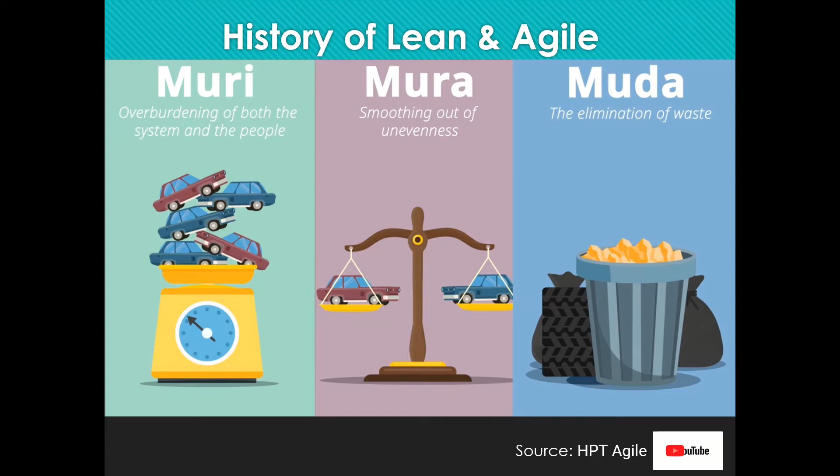It focused on three core objectives: the reduction of muri, or overburdening of both the system and the people; mura, or the smoothing out of unevenness; and muda, the elimination of waste. All three are important components, but within that, much focus is given to waste. A set of 7 types of waste were identified, including items like overproduction, defects, unnecessary movement, etc. An eighth item was introduced in the 90s around underutilization of people.

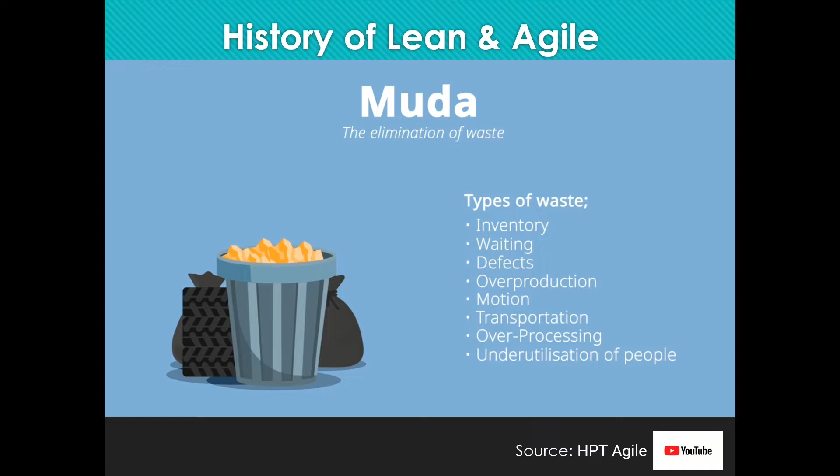Over the next 30 years, Toyota would go on to develop the Toyota Way. And as this gained traction around the world, and as it moved west, it would morph into what we now call lean manufacturing, or simply lean. This term lean was first mentioned in a paper in 1988, Triumph of the Lean Production System.

It still focused on Muda, Muri, and Mura, and also focused on increasing value by removing anything that does not add value. So, all in all, the second half of the 20th century saw the origins and flourishing of lean in manufacturing.

Over time, lean principles began to spread wider than manufacturing. Nowadays, we hear about lean product development, lean construction, lean government. This list goes on. In each case, the objectives can be very different, and hence the methodologies and thinking have evolved to solve the problems for that specific area.

So let's move on to Agile.

Iterative and incremental development can be seen as far back as the 1950s. But I'll start this story in 1986, because this was when a Harvard Business Review article called The New New Product Development Game used the concept of Scrum from a rugby scrum.

And it denoted a shift from the idea of relay races, with teams handing the baton to another team to finish the race, to the idea of a single unit of people working together from start to finish to complete an endeavor. It was in software development where these principles gained traction to become agile as we know it today.

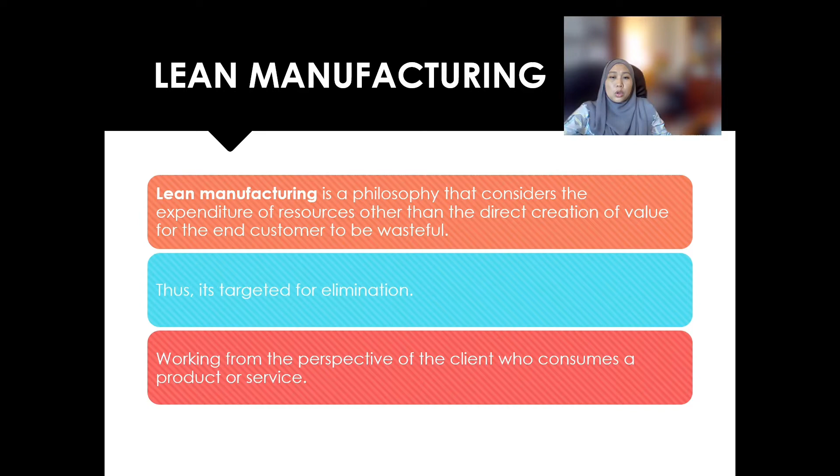Okay, we have learned about JIT. So as I mentioned previously, the JIT element concept is the effort in order for some company to achieve lean manufacturing. Thus it is targeted for the elimination - the final aim is to eliminate all the waste stated under the production, and work from the perspective of the client who consumes a product or service.

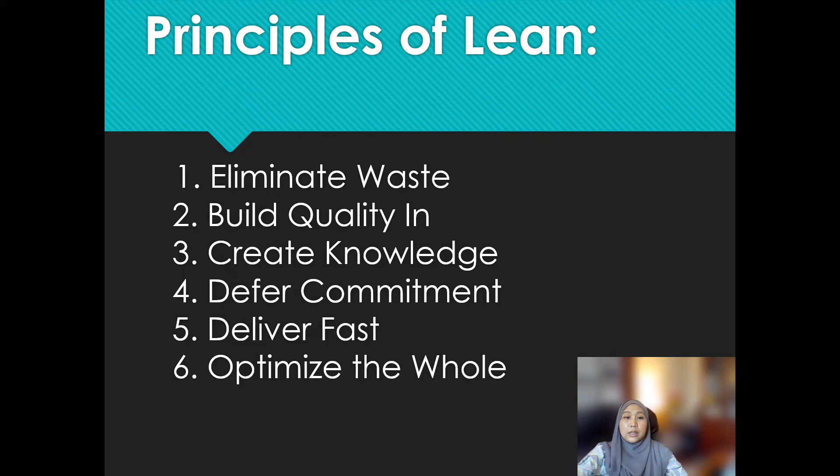So these are the principles of lean. The first one, eliminate waste. There are 7 to 8 wastes classified under production: build in quality, create knowledge, defer commitment, deliver fast, and optimize as a whole.

Alright, so let's see this lean manufacturing plant tour, one of the good examples for further your understanding.

You may have noticed a breath of fresh air is blowing over the Atlas Copco factory floor - a breath of lean air. Lean manufacturing is about the elimination of waste. We can really concentrate on the tasks which are giving added value to the product. We eliminate all other tasks which are not giving added value, like walking, waiting time, bad quality, and so on.

The new assembly lines look very different compared to the old ones. The previous assembly lines were designed in a totally different way. We looked to the compressor, we looked to all the material which was needed to assemble all types of compressors, and we put it into the assembly line.

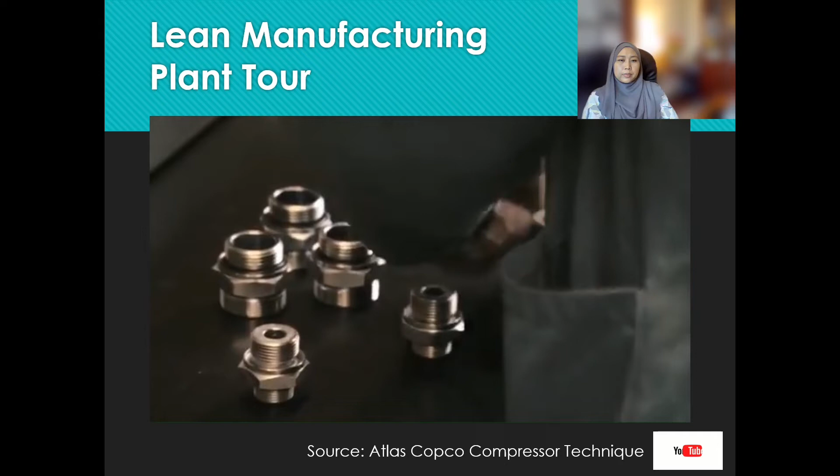In the old way of thinking, operators were literally surrounded by mountains of components. They had all the components in small blue boxes in front of them, and they had to choose the right component. Sometimes operators made mistakes and took the wrong component, and it led to waste. Those days are coming to an end.

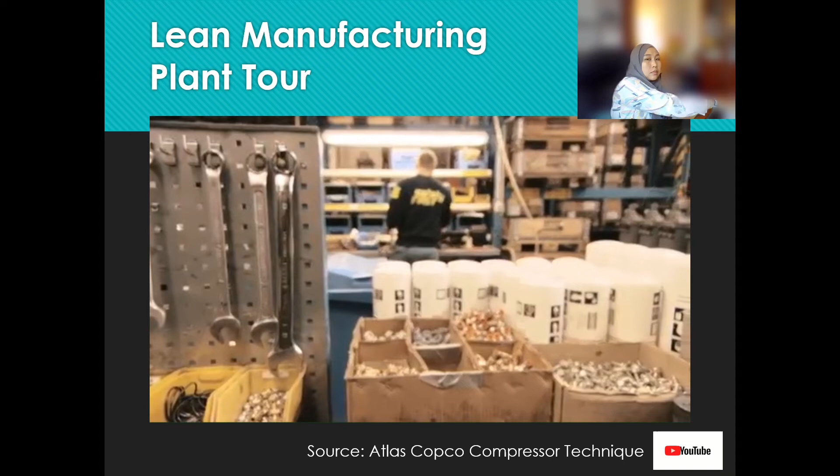Now we look to the operator and we look to the tasks of the operator. Instead of having all material on the assembly line, we bring the material to the operator in direct access to the operator.

On a lean line, the operator is the center of things. We bring all the material in sequence to the line, so the first component on the line is also the component he needs for the machine he is working on.

Quality is of course always our first concern. It's therefore we introduced tools like poka-yoke plates. The aim of the poka-yoke plate is that they start up at the beginning of the assembly by filling up this plate, and at the end of the assembly the plate must be empty.

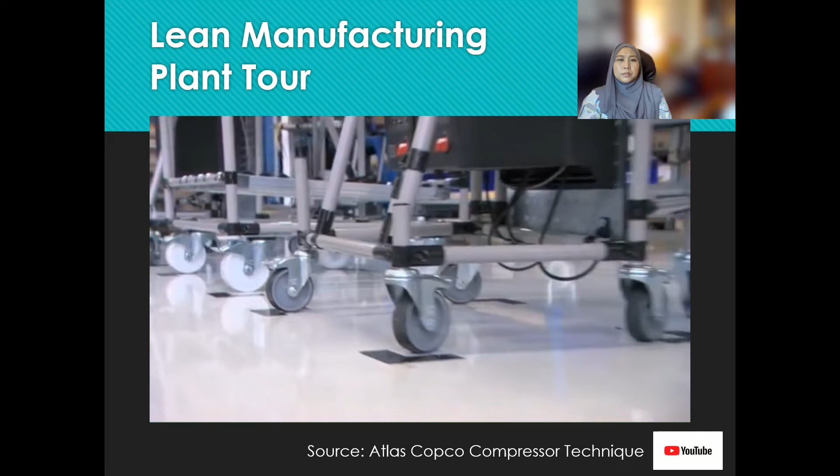The lean concept makes life and work easier for the operators. For instance, all carriers are on wheels. This also makes it easier to quickly adapt the line to changing production needs.

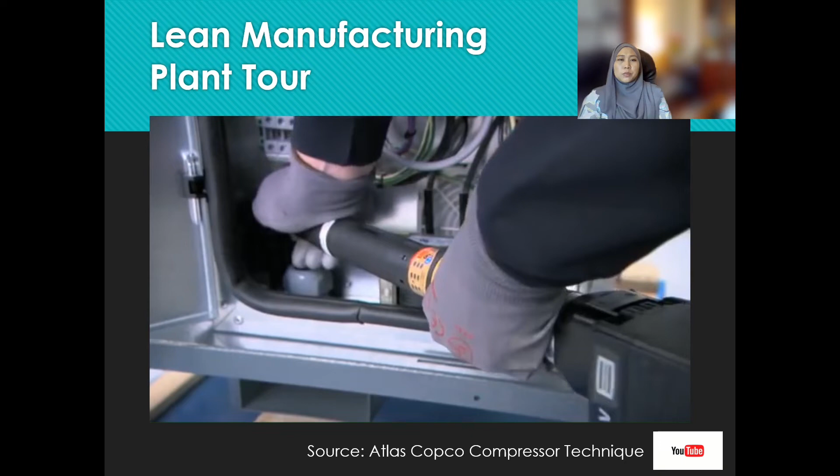Modern electrical tools are at hand. These ensure that the perfect amount of torque is applied and that all necessary screws are used. A barcode-based traceability system guarantees that all the right components are installed in each unit.

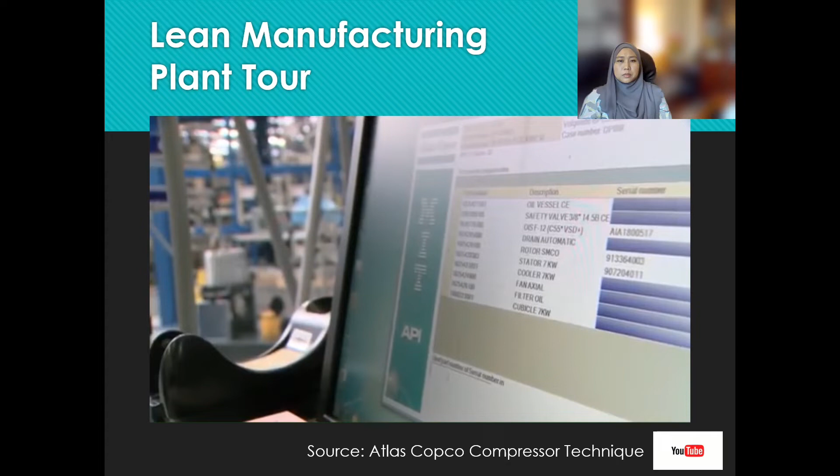We really focused on the design for assembly. We also looked at the way of working for the operator, so that the operator has easy access to all the components, so that he can easily assemble the components into the unit.

Another aspect of lean manufacturing is to strive for fewer components - try to standardize as much as possible. We try to have the same components as much as possible for the different types of compressors. By focusing on standardization, we're also able to reduce the total assembly time.

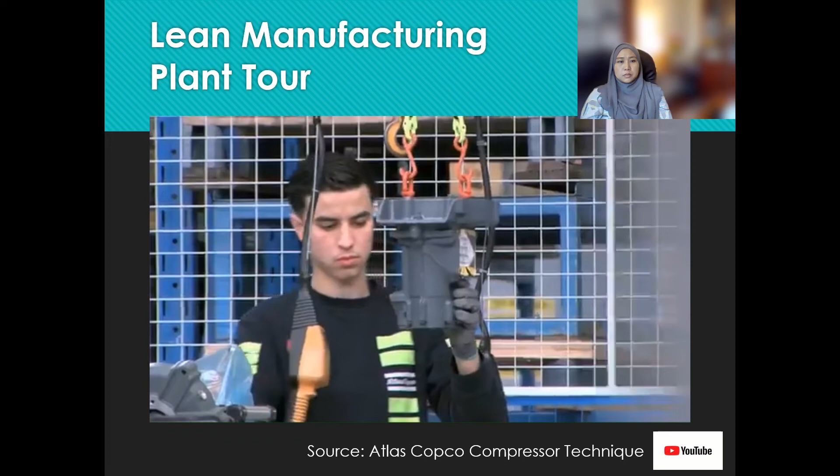As a result of the shorter assembly time, the throughput time is shortened as well. Lean manufacturing is essential in ensuring accurate delivery times for high-volume production.

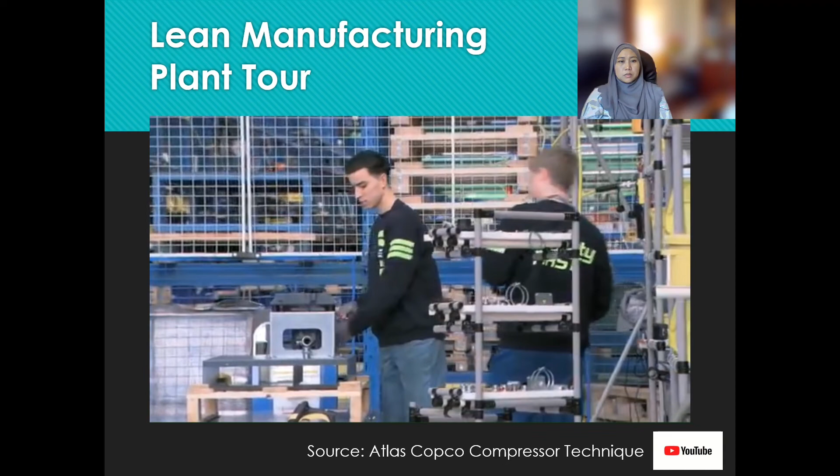Not only was the assembly time shortened, so was the assembly line. This assembly line is much shorter than the classical assembly line. For example, when we first designed this assembly line, not according to lean principles, it was 17 meters. Today, this production line is only 14 meters. This is only by implementing lean principles like sequencing, bringing material to the operator, and designing the workstation according to the needs of the operators, not according to the needs of the compressor anymore.

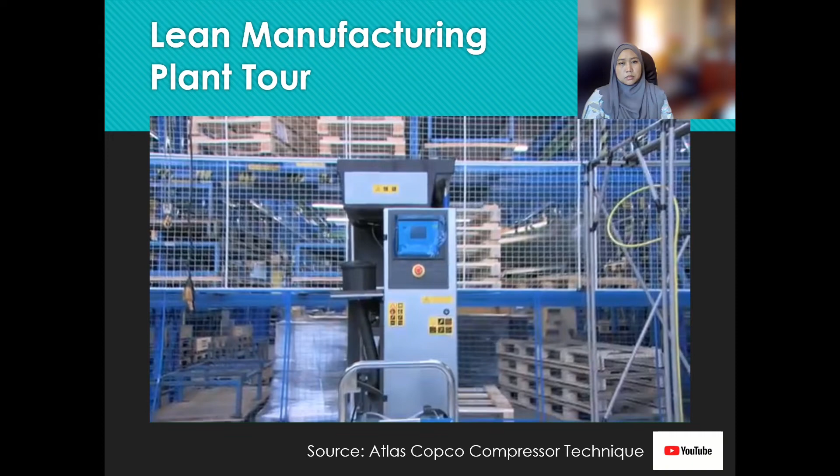A lean environment and product design, both tailored to the needs of the operator. Less components means less room for error.

Lean manufacturing is the way forward. In fact, the first results of lean manufacturing in the portable energy division have proven this point. On-time delivery increased by 15% and quality improved by 11%, a resounding success.

By implementing the principles of lean manufacturing, we reduced the total amount of components, we reduced the working time, and by doing so we were able to reduce the amount of workstations. We were even able to improve the quality, so it's a win-win situation.

So this is the Agile definition. So for the Agile manufacturing concept or strategies.

It is defined as a term applied to an organization that has created the process, tools and training to enable it to respond quickly to customer needs and market changes while still controlling cost and quality.

Agile manufacturing is seen as the next step after lean manufacturing in the evolution of production methodology. So in order for a company to achieve or implement agile strategies or concepts in their manufacturing, in their production, they need to first strengthen their lean principles, as has been mentioned just now and shown by the example of the Atlas company. Once the company has strengthened all the lean principles, only then can they strive to achieve or implement agile manufacturing, right?

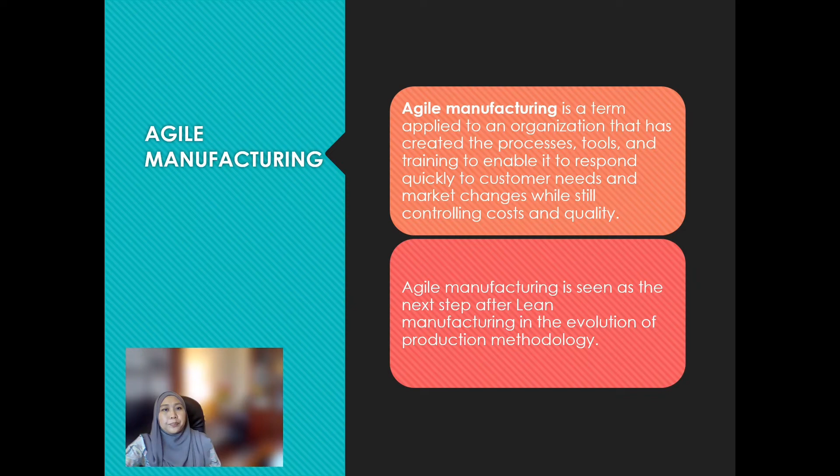Okay, so basically Agile is one of the structured models or frameworks created by using software, by using supporting applications, technology advancements like IoT, Internet of Things, database systems, and then we have the software that integrates all the lean principles in order to achieve a more efficient production for business purposes.

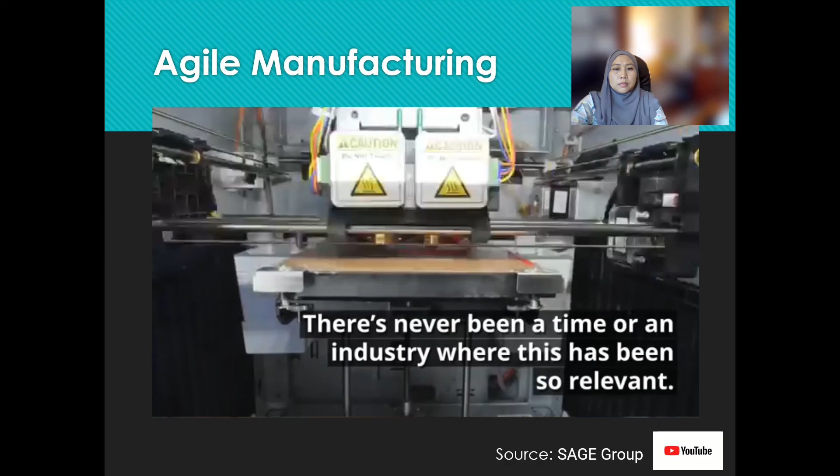Alright, so this is the 4-quadrant matrix that defines agility and lean. The agility is needed in less predictable environments when volume is low and the need for variability is high.

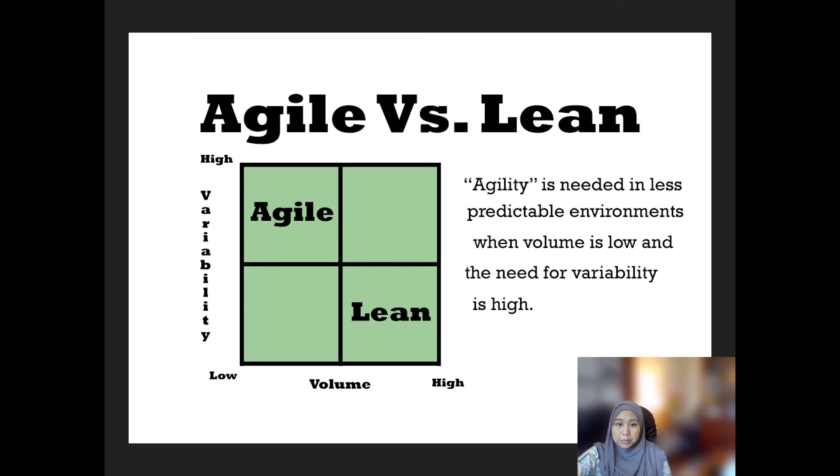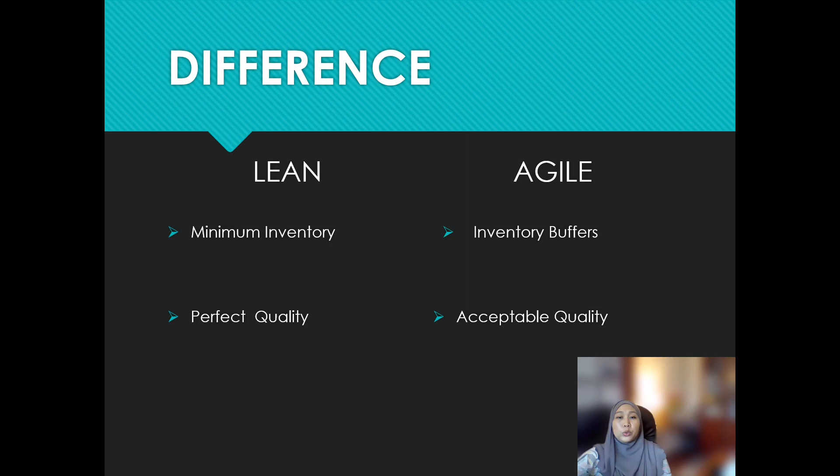Continuing, this is the difference in terms of inventory. The lean strategy has minimum inventory, but for agile, you need to have an inventory buffer, meaning you need to be ready with your inventory stock to cope with agile demands. For lean, you need just-in-time inventory. Whereas for quality, lean requires just enough for perfect quality, but for agile, you need acceptable quality.

And this is another illustration to define the difference between agile and lean. So lean operates at the factory floor level, and agile operates at the enterprise level as a whole, right?

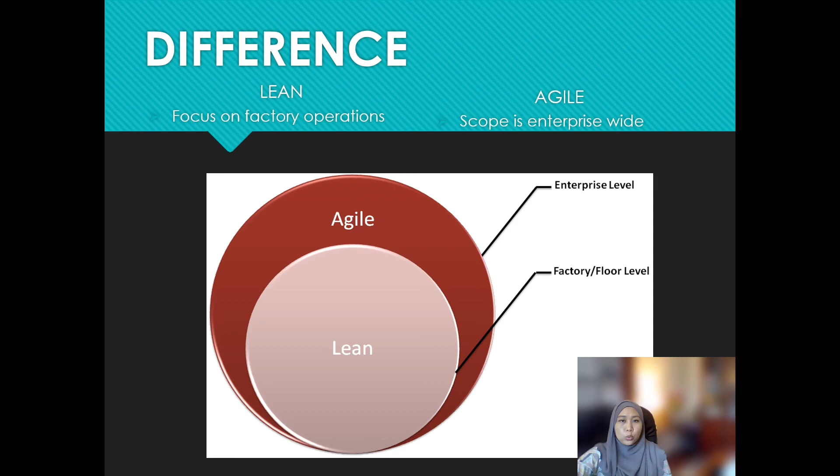Continuing, for lean, in terms of production, we have mass production, and for agile, we have mass customization. In terms of emphasis, lean emphasizes efficient use of resources, but agile emphasizes continuous changes. And the last one, lean has a smooth production schedule, but for agile, the production schedule is responsive to change.

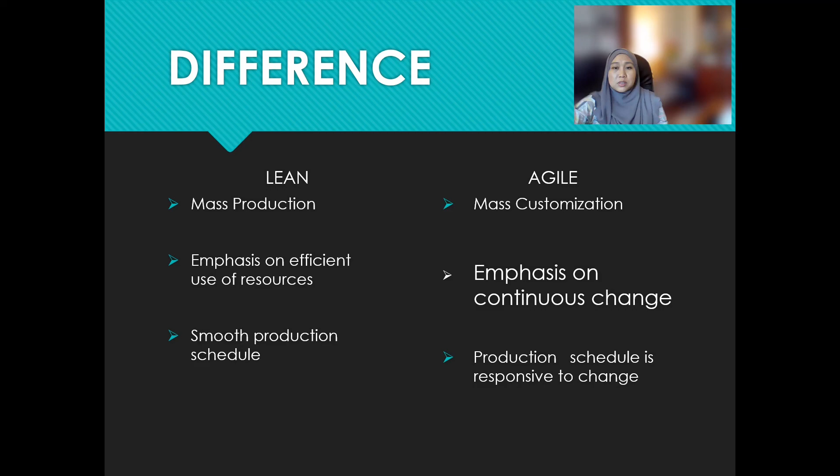So this is another illustration between lean and agile. The agile method has been primarily thought of for software development, and other business disciplines have also adopted it. Lean thinking is a process improvement technique where teams prioritize the value stream to improve it continuously.

Both methodologies look at the customer as the key driver to improvement and waste reduction. Both methodologies also look at improvement as something continuous. So both strategies are valuable and beneficial, but only the strategies - looking back into the strategy, what are the companies trying to achieve?